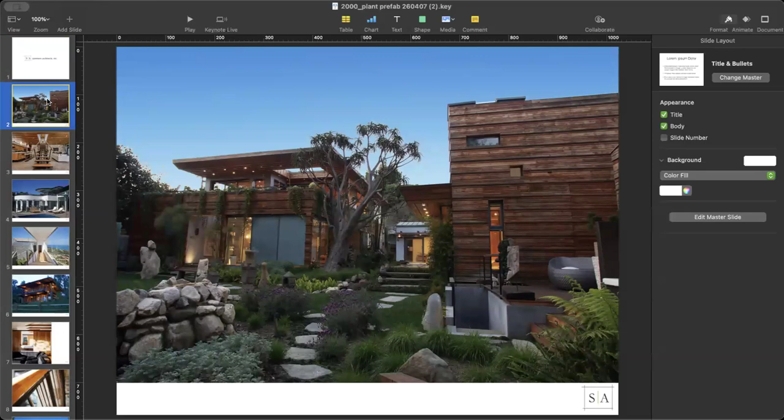This is a house in Santa Monica Canyon — actually a fire rebuild we finished some years ago, with a prefabricated stair. This is another house out in Malibu up on the bluff, which also had certain prefabricated elements. This is the bridge house — we originally conceptualized it as a 30 by 30 pod, and we were going to build it prefabricated. Unfortunately, the client was a developer owner, and his builder wasn't supportive of it.

Unfortunately, one of the things with builders is if they don't fully understand it, sometimes they feel like it's taking work away from them by putting these projects into a factory, and taking labor away from a lot of their subcontractors. That's one of the reasons it's easy for us to convince clients, because we are also the builder. We fully understand all the efficiencies that modular and prefabrication can afford a project.

This, believe it or not, was a fire rebuild. This burnt down in the fire. There were modular elements to this, and we just finished this project about a year ago.

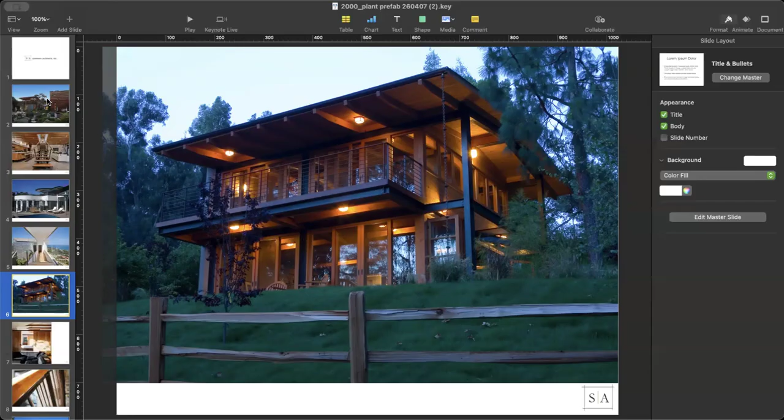This was another home up off of Bel Air. The fire came very close to igniting this house, within 10 feet. It was not a fire rebuild, but we learned a lot through that process.

We do a lot of custom work, this is a custom prefabricated stair, all the steel elements. We realized the more elements that can be built off-site and brought into site, the better. Building in a controlled factory, you can use CNC machines, special panelization cutting machines, punch press labor. There's so many different elements that can be built offsite. So whenever we can have something built offsite and brought in, that saves time and money for the clients.

This is another project we did, with all these finished panels, doors and major elements. We imported all this. We had 14 shipping containers coming in from all over the world to bring this house together, all prefabricated panelized elements.

This is one of our first beach houses, with modular overhangs, etc. This was, believe it or not, Brad Pitt's house. He was a big believer in prefabricated modular, a great client. This was a house he had bought, and he originally hired us to help him with it. This was affected by the fire.

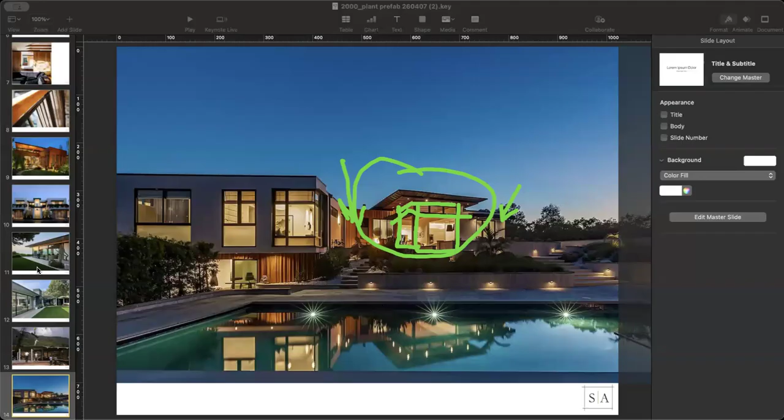So when you want something that doesn't look like just a bunch of boxes coming together - that's one of the negatives some people have in their mind, they think trailer parks, they think just a big boxy house. Usually that's because of poor design or maybe some other constraints. But as a design architect at our core, we believe prefabrication doesn't have to be not beautiful.

Obviously every car - can you imagine manufacturing a car by hand, designing every car and trying to manufacture it by hand? It would cost $10 million a car. So the perfection of prefabrication of cars and automobiles allows us to buy a high-end Tesla, the most cutting edge piece of technology, for $35,000. It's pretty amazing. Why are we not doing that for houses?

Well, there's a lot of reasons for that, and I'm sure Steve can share with you. I can also share with you.

When we start telling people why doesn't everyone do modular and prefabrication, we're kind of like, good question. Then we go through the list of reasons - they're more excuses, really - but we can talk more about that if anyone's interested.

But this house turned out really beautiful. This house is worth about $10 million, so it doesn't detract from the valuation of the property. When you sell a house, you don't have to disclose how it was built. With trailer parks, because they're on impermanent foundations and permitted differently, the financing is different, so there's a different valuation with trailer park homes. That's why modular and prefab gets a bad rap.

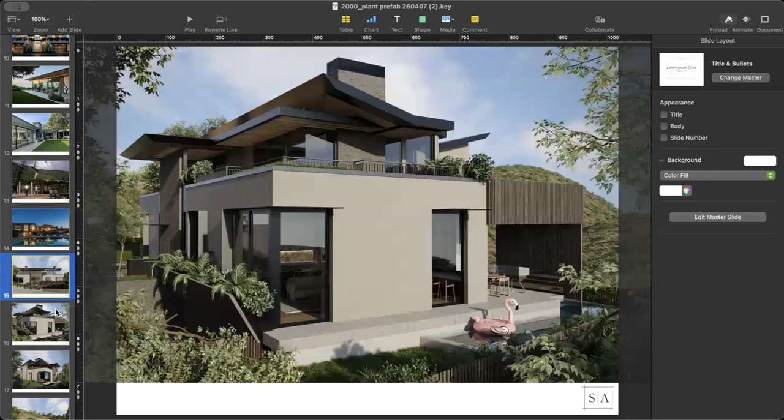A couple other shots, here's a little video. Let's see if this video works - it's a little AI video we created for this project.

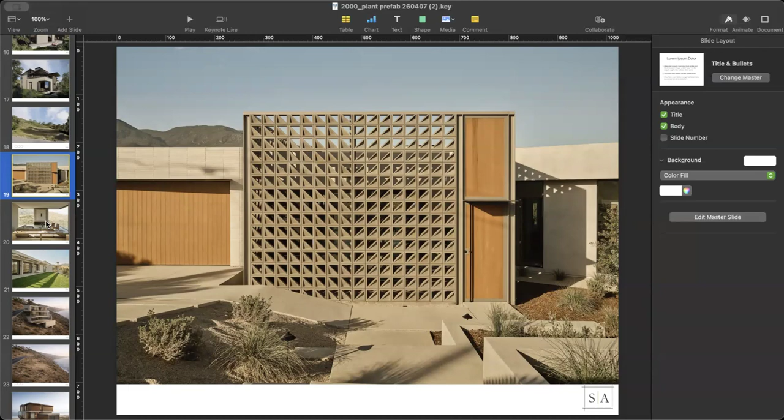This is a house that visually uses modular blocks. There are elements of this house - we didn't use modules, but there's a lot of elements of prefabrication. Again, we worked with the developer. This house sold for over $6 million, so it doesn't detract from the value of the house.

Pulling the window and door systems all the way back, etc. This is another fire rebuild that we're doing right now, and here's another little video we did for the client.

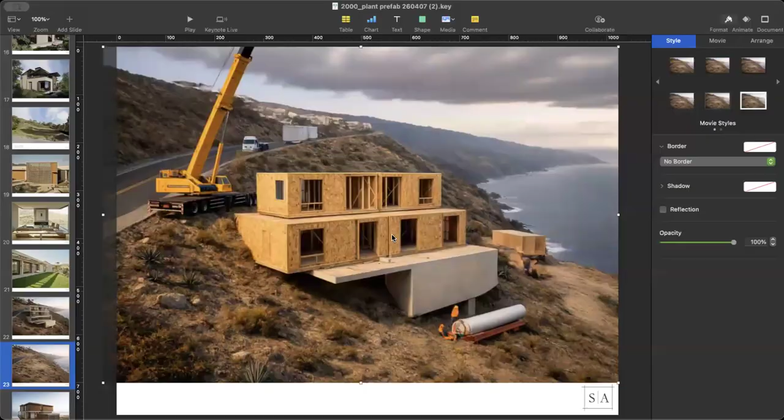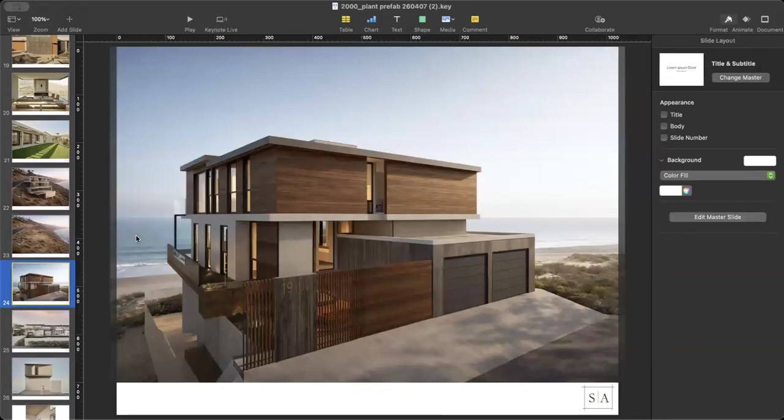Here's one we just signed with Steve to start pre-design on. We already have approvals through Malibu, and if anyone knows, Malibu is probably one of the most difficult jurisdictions to build and get approved in. This was a beach house, 3,700 square feet, modern, for our client.

Here's another project we're just about to pull permits on - another beach house we're working on with Steve. We were just in an exhibit side by side with Steve here in LA through one of the universities that was co-sponsoring it.

We're just about to submit - we already have our initial approval through the city of Malibu and are just about to submit for the building permit. We're working with Steve on this one as well.

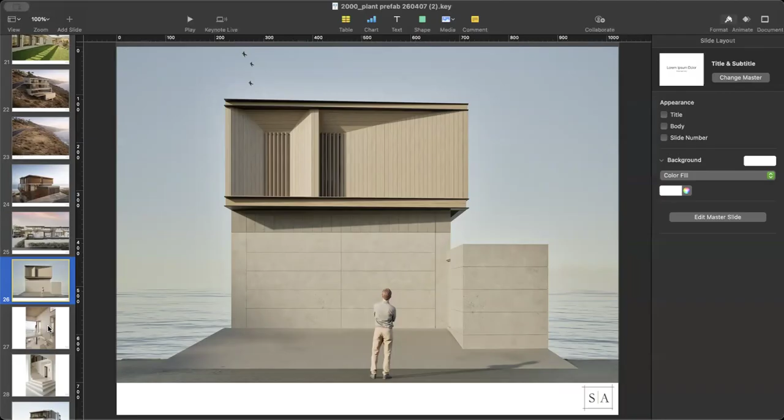There's some interior shots of that other house, prefabricated modules coming through, big atrium because we're doubling up on the top module - we're stacking, and I can explain more detail if anyone's interested.

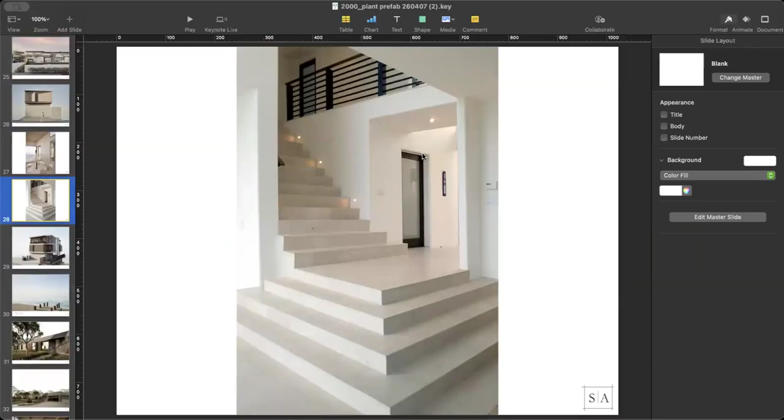It's one of our first beach houses, floating above the water. Here's another little one - this house is another.

This will probably more likely be panelized. This is three stories with a pool - another fire rebuild, beach house as well. Here's another little video for this one.

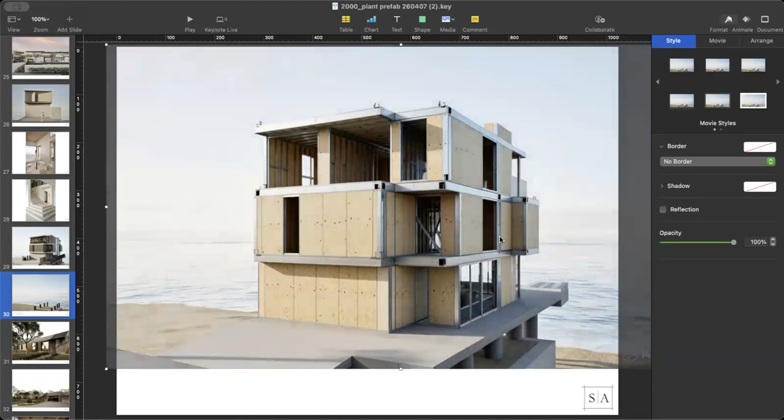This kind of gives a client a little vision of how it's going to come together.

Another fire rebuild, right side by side of that other prefab modular we did. We're working on this for a developer, and we already have approvals on this through the planning department.

Here's another rendering of that house. This is another house on the bluff on PCH. Elements of this will be prefabricated.

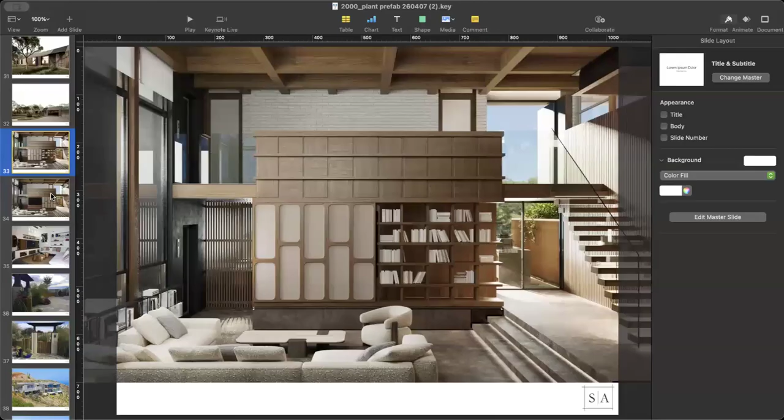Unfortunately, for this particular house, the logistics of the driveway and the spacing just didn't work to make it modular prefab, but there's a possibility we're going to be doing some panelization. Steve, we haven't spoken about this, but we'll be getting permits on this one - we have some initial approvals from the city and will be getting our permits shortly.

This is a beach house from the producer of the Friends TV show - if anyone's seen that, he's one of the original creators. This is his house in Malibu. It's another bluff top house we did for a developer client.

This was another shot of that house on the hill, 30 by 30 modules.

There were elements of prefabrication on this one. It was not modular, but there were some panels that we brought in. There's a lot of custom construction, but just to give you a taste of other projects that we do here in the office.

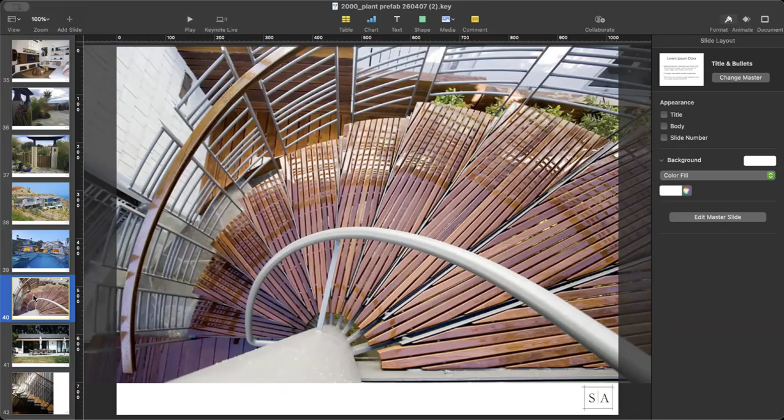Of course, stairs. We love to prefabricate stairs. These are perfect steel stairs. This one had a 3-foot tread at the bottom and a 10-foot tread at the top, called the Nautilus stair. This is one of our really special stairs we did, but all prefabricated.

A little guest house element we did, and another shot of the stair and railings.

So anyway, that just gives you a taste of who we are and some of our design work, so you get a sense of who we are. That's our presentation. I can open up to questions and answers if anyone wants to discuss any specific elements of what you saw.

Awesome, thank you so much, Christopher. Wow, what an incredible body of work. We're really honored to be working with you on three homes. Thanks, Steve, and hopefully many more.

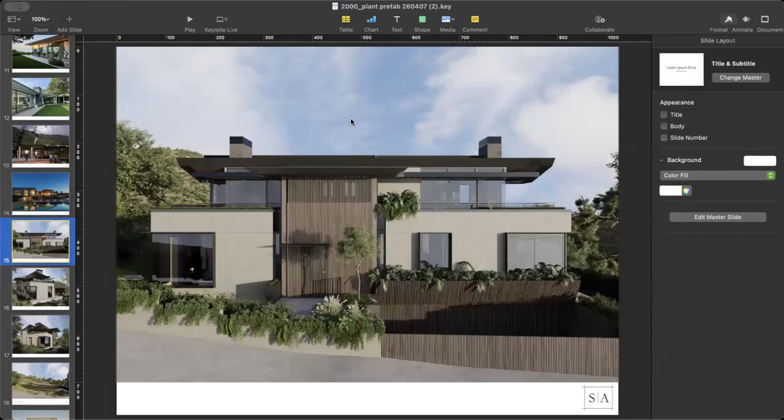The metal and ceramic and some of these other approaches are important. Plant Prefab is constructing from wood-based and composite-based sources, but I was impressed by their integration of metal, and they have a special unit there that I think I recognized. Also the hybrid panelization and modularity give you the flexibility to make those choices effectively.

Absolutely, yeah, I have a perspective on this too, but I want to give other people time for questions on other topics if we have them. If not, I'll come back. But any other questions? This is Susan. I don't have a question, my camera's not coming on.

It's very interesting work, and I was going to get to the questions about fire sprinklers. I have been designing a property, I'm an architect as well in Massachusetts, and I found out I have to put in a fire sprinkler system, and that is going to require more too. So I'm kind of at a standstill because it's overwhelming to me. I also have a cabin in Northern California, and now I have California Fair Plan, and I've been going through several rounds of measures to fire harden the home so that the insurance will fully cover it. And they still want more and more. Every time I do more, they want more.

All of this in Malibu, right? There are no water tanks, right? Do they have their own hydrants and water in all of these hills, or are there tanks on site for the wildfire?

Sometimes, but water is a major problem in Malibu. All the infrastructure is decades old, it's not adequate enough. As you probably heard in the last Palisades fire, one of the three major reservoirs was bone dry, and that really added to it. A lot of our clients have stories where they were on the roofs of their own homes, spraying down their homes and neighbors, and all of a sudden they just ran out of water.

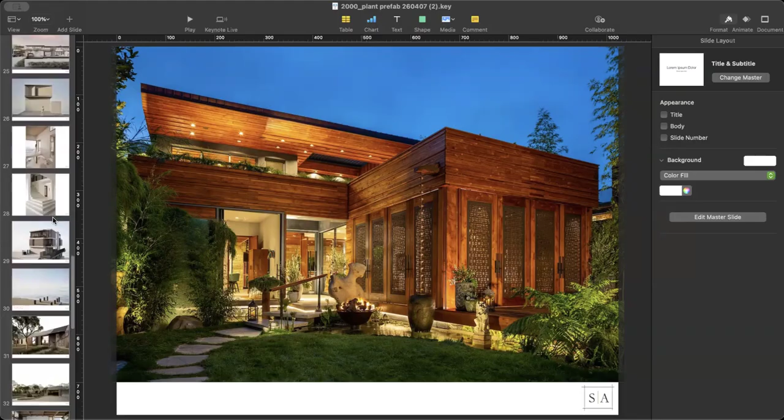I was an engineer working on pre-visualization tools at Autodesk, and at Silicon Graphics, where we did building simulation and design technology. I saw the one bluff house you had done an animated rendering for, and I'm curious how, in your design build process, you work with a prefab factory—because you've got a client to support and meet their expectations, even get them to buy in certain ways, and they're obviously using some of those tools. It seems to me that both pre-visualization and simulation are important technologies to include in the design build process, and I'm curious to know how you approach that.

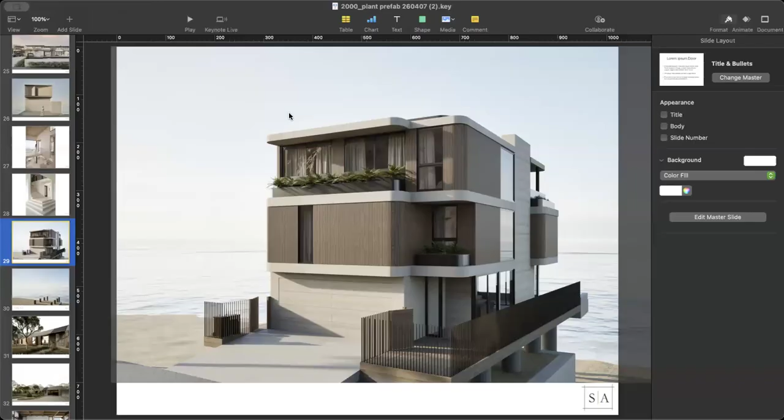It is amazing. I did participate with Steve in another webinar around using AI, and that's a fascinating aspect. We're working on some carbon footprinting with AI and some other things. I think applying technology in a realistic way while also maintaining aesthetic qualities is really important.

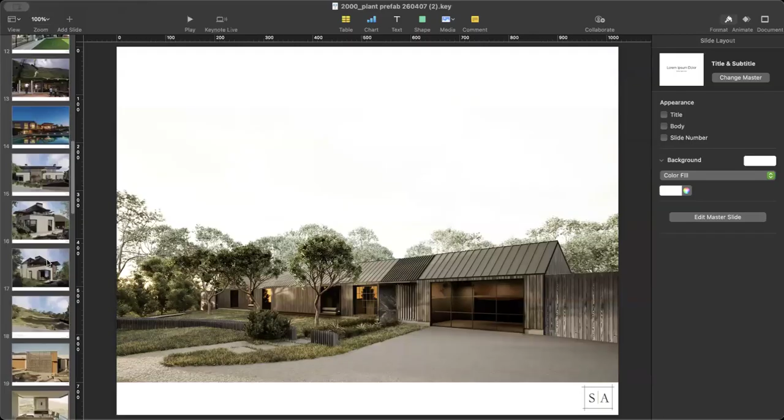There was a question from Vera Worlds Arnold—I'm not sure if this was a joke—do you design beautiful, affordable housing? I think what Christopher shared is beautiful, it is housing. Affordable, if you mean literally people who are income restrained, that's not the housing you saw today. But we certainly have worked on affordable housing.

We did a great project with Brooks + Scarpa that opened a couple of months ago in Santa Monica. So you can go to our website and see that we do affordable housing.

And Christopher, have you done affordable housing? Yeah, that student housing down in Los Angeles had an affordable housing component to it. Then of course for the students—I mean it's USC, so it's an expensive university—it was high design, but there was an affordable housing component to that student housing project.